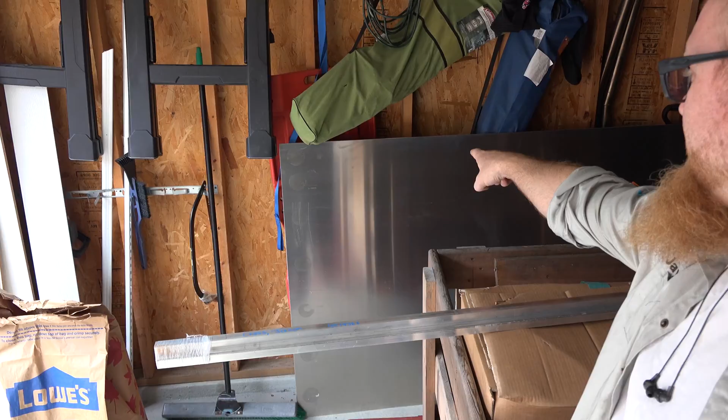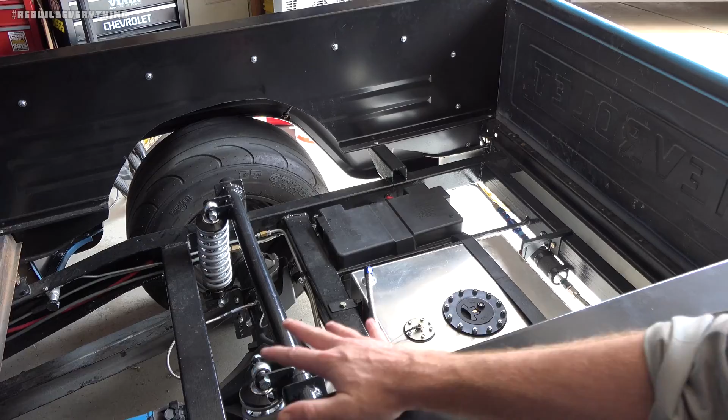Well, it's about time we went ahead and got around to the bed floor. If you've been watching the channel a while, you'll know pretty much everything back here had to get redone. The frame is new, the suspension is new, the bed mostly is new. I fixed the tailgate, had to redo that, did the taillights, and all this stuff, but there is still no bed floor in the truck yet. And because of all the changes to the suspension and where the fuel cell is and all that stuff, we need a custom bed floor.

A regular wood bed floor isn't gonna fit over all that stuff, and it's not gonna provide the look that I want to go with. So let's talk a little bit about what the plan is here. I've got the bed floor behind me and all this new material.

The idea is to go ahead and use that aluminum channel to build sort of a subfloor for the bed, which we can then put the aluminum 080 on top of and make a skin or basic floor. Ideally, when braced, that material should be plenty thick to hold backpacks and basic stuff I carry on the road if we do a road trip, but it is gonna be a lot lighter than the wood situation, and it's also gonna be modular, meaning I can remove the rear to get the fuel cell and all that kind of stuff, as well as having cover options for the notch area.

We'll talk a little bit more about those once we get a little bit further into it. So I've already taken some measurements and laid out the idea that I want in a quick sketch. Now, it's not going to be the easiest for you guys to look at this the whole time, so let's cut away to an overhead of the bed and we can talk a little bit more about it.

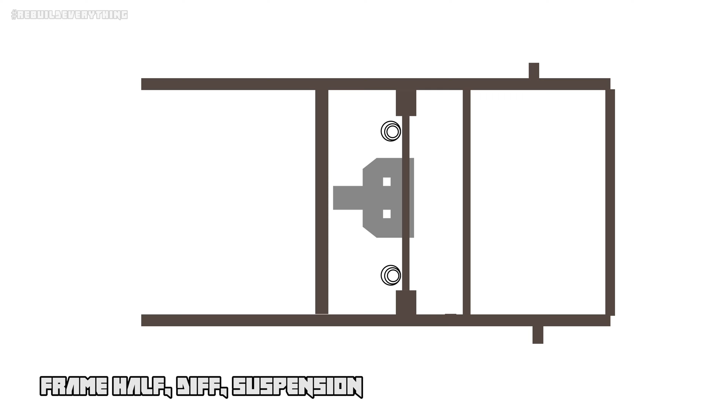So the idea is fairly simple. We'll go ahead and use that 3/4 inch channel and make a raised floor in two primary sections. A front section, which will go under where the fire extinguisher is, which will be bolted in most of the time, and a rear section, which will be able to be quickly removed to access the fuel cell and the battery and all that. The third major component won't really have too much of a frame, and it'll be removable.

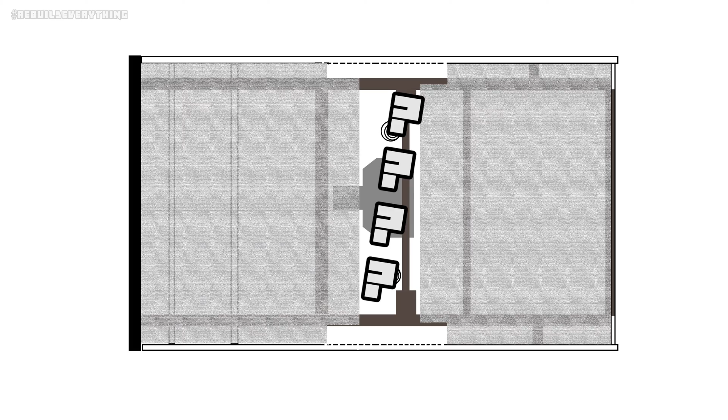We may or may not make two variants of this, one sort of for the road and one sort of for show, but again, we'll get into that once we get a little further into the design process. So let's talk about this front area first. It's basically just got a frame around the perimeter with a couple of reinforcing bars. This one will bolt down more permanently, and it'll use regular fasteners.

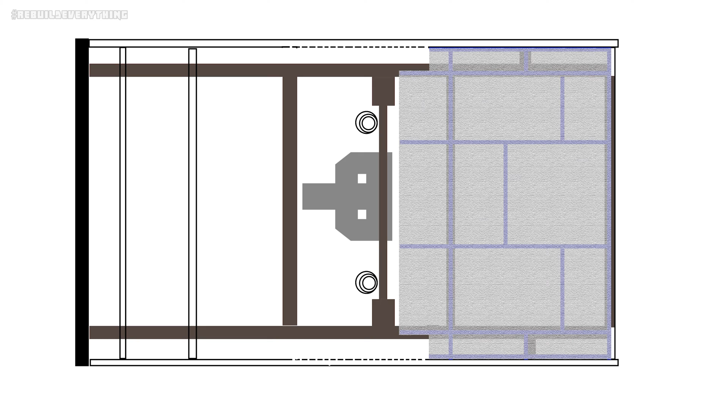The rear panel is pretty much the same as the front. It's a perimeter with a couple of intersecting bars to support it. The biggest difference being it needs to be quickly removable so we can get access to the fuel cell and the battery if we need to, as well as things like the fuel pump and the wiring for the taillights. I don't think it should be too bad, but the right choice of some sort of hinge or fastener system is going to be pretty crucial in the design.

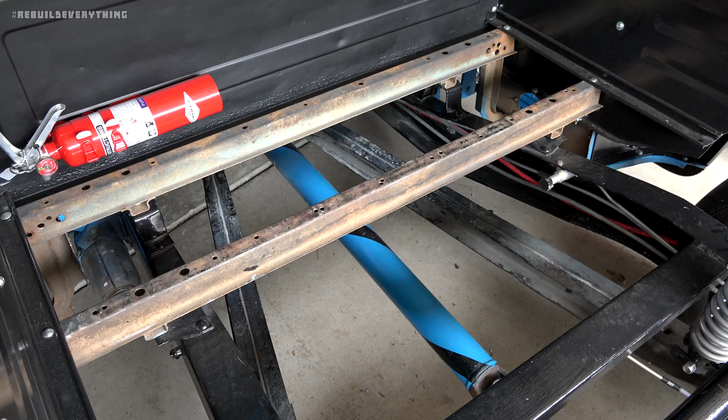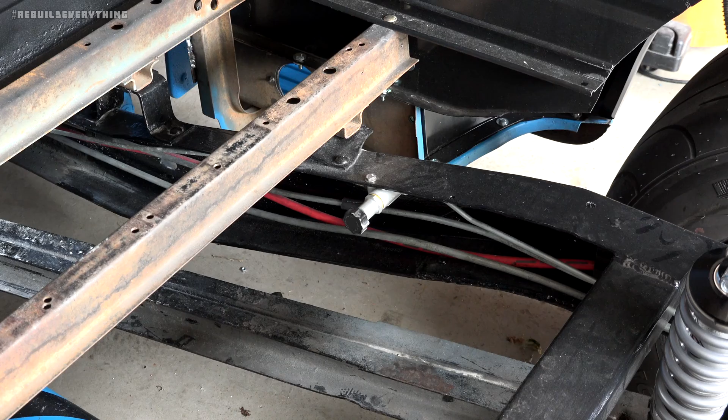So here's that front area. No real major obstacles to worry about. We do have to fit under the fire extinguisher, but I've already taken plenty of measurements to ensure that the overall bed height won't come anywhere near where that is, and it'll still be fully able to be accessed. There is the proportioning valve, but the reality is once that's set, it doesn't really need to be messed with too much, and there's reasonable access through the wheel well. I don't think we'll have to worry about cutting a special access door or anything for this, but the beauty of the aluminum is that if we ever want to in the future, it's pretty easy to add.

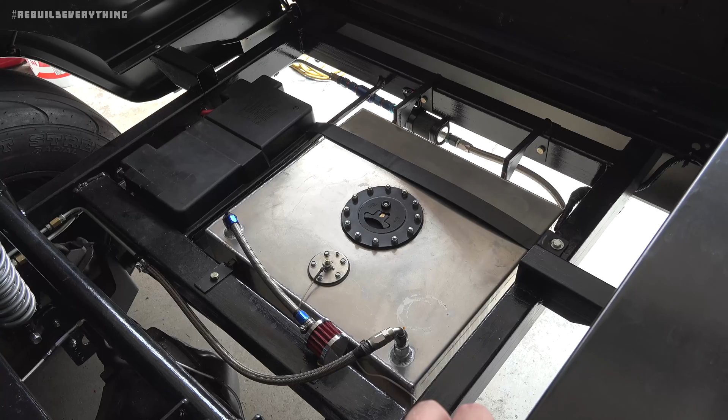The rear area is pretty much the same, except we don't have lateral crossbars for full support, so we need to make sure that the frame rebuild has a decent amount of reinforcement in it.

There's not going to be a lot of weight in here, but I do want it to be able to hold a jack or a few backpacks without caving in on top of the fuel cell. We do have a couple challenges back here. Obviously, it needs to be either removable or have an access door in it for the fuel cell and to get to the battery in a reasonable amount of time.

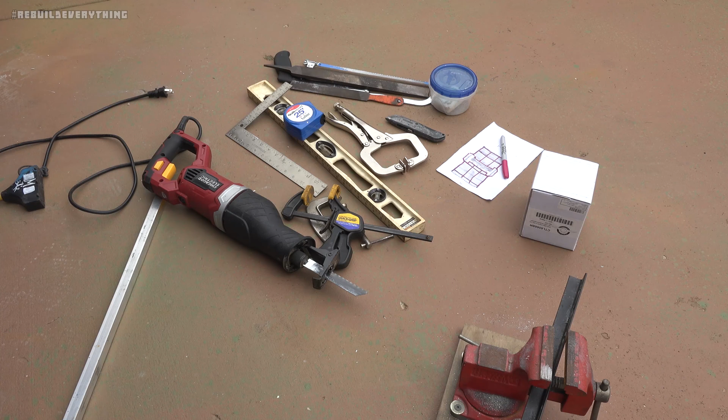As well as servicing the fuel pump there in the back. We've talked about the what, now let's talk a little bit about how exactly we're planning on doing it. I got a selection of tools laid out here that we'll be using. I've got clamps, measuring devices, squares, some marking devices, my drawing.

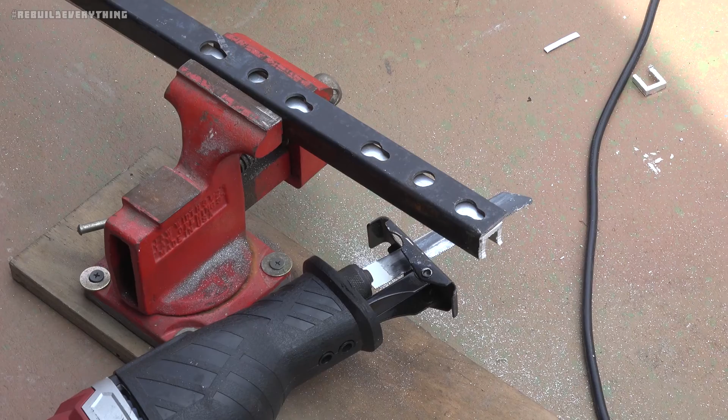You can see the vise at the bottom of the screen, a support block, some soap for lubricant, and you see the Sawzall. Now a chop saw or a deep cut portaband or something like that would be ideal for this, and I definitely want to add one to my list of tools, but it's not in the budget right now, so I'm using what I've got.

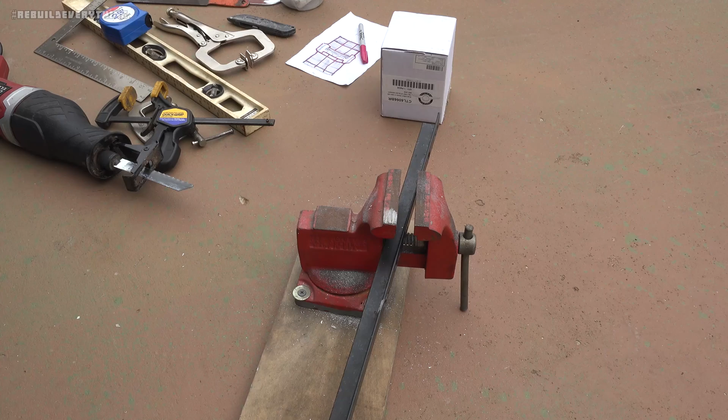Now the Sawzall has a tendency to wander a little bit, which is why the vise and that piece of angle iron here is at the bottom of your screen. The angle iron, well, that's a little bit different of a story. It's just some regular steel angle channel here with keyways into it.

What is the stuff called? It's the stuff you use for like racking and shelving. And one end has definitely been perfectly squared off. Now the idea behind this is we're going to use it as a guide in the vise when the aluminum channel is in there. That way we have a harder material against the cutting edge, which I can rest the saw and make nice repeatable cuts through the work material.

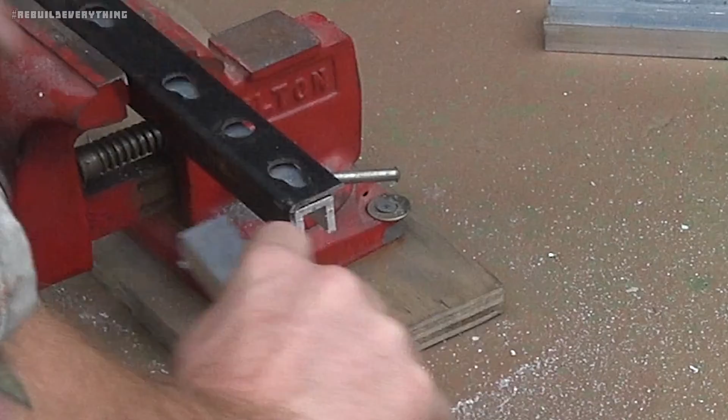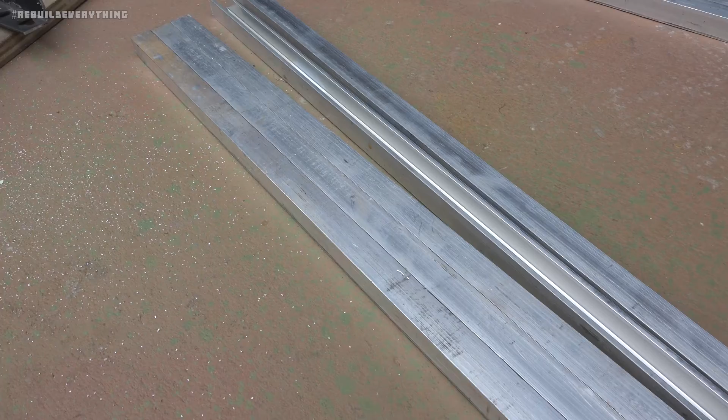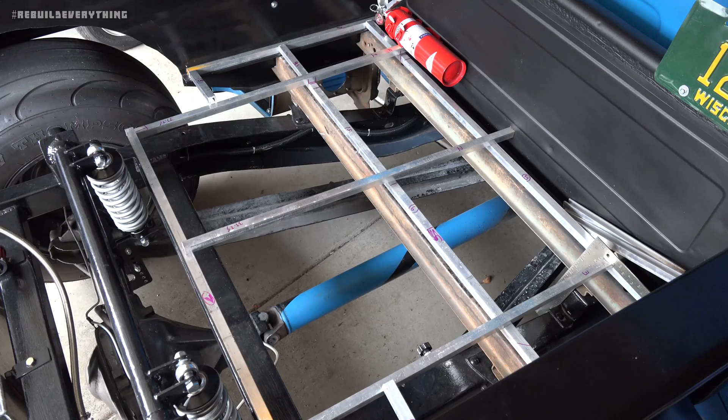So obviously everything is temporarily held in place. It's all kind of sitting on top of each other. All of these have to get notched because they will all fit into each other with a nice flush surface on top. But you can see the idea there. We've got the perimeter working its way all the way around the outside into there.

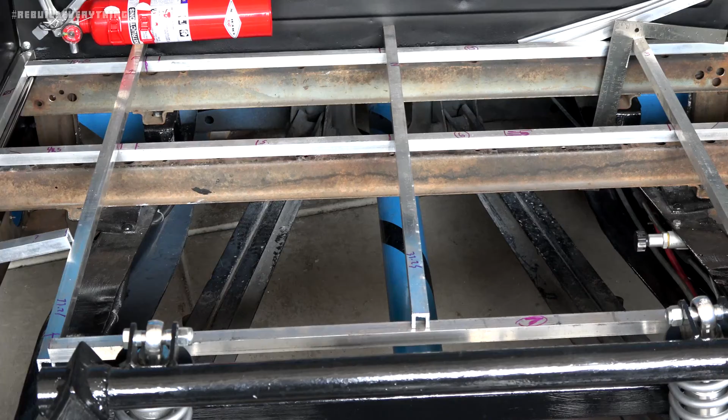We've got our 3 forward stabilizer bars here, which sort of brace the middle. Our 2 laterals, which are gonna go across the existing bed sills. And we added one for the front here too. That way we do have some support around the suspension area. Because again, you never know if there is some stuff in the bed. I want it to be able to support at least a little bit of weight in all places.

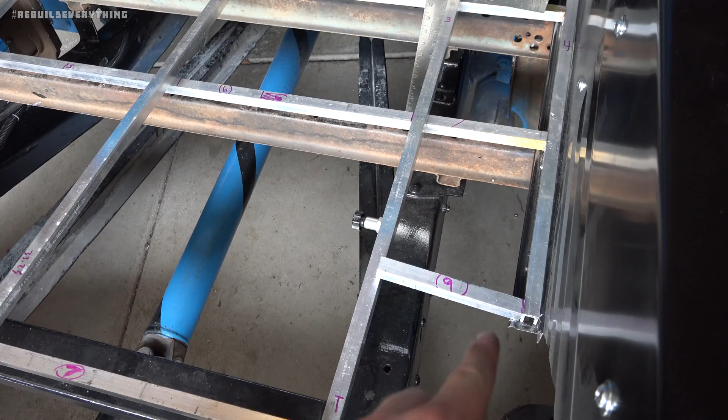I'm pretty happy with the way that came together. Oh, that's right, also added a couple little sidebars here to fill in that area there so it wasn't just wide open. So that's the basic idea for that front panel there. As you can see, I got sort of a base frame going for it. I need to notch all those tubes and then start getting it sort of tacked in place.

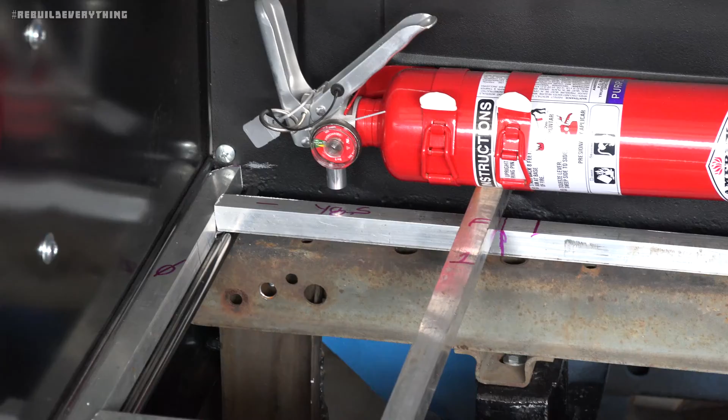There's a lot more work to do, notching and stuff like that, as well as starting on the rear panel and of course the sort of tub area in the middle. A ton more fab to do, guys, but I'm gonna leave it here for now.